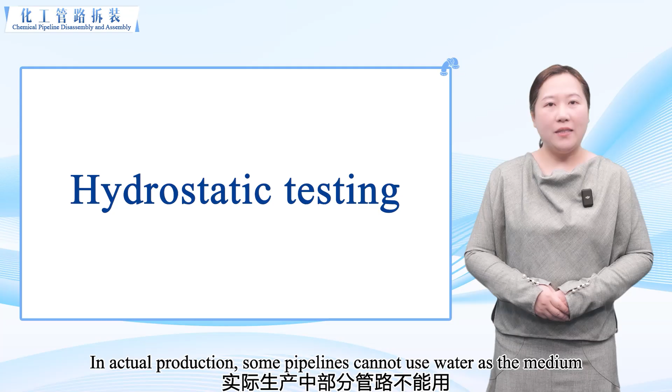In previous lessons, we learned about hydrostatic testing. In actual production, some pipelines cannot use water as the medium to test the strength and tightness of the pipeline, so gas must be used as a substitute. This lesson will focus on the conditions and requirements for pneumatic testing and leak testing.

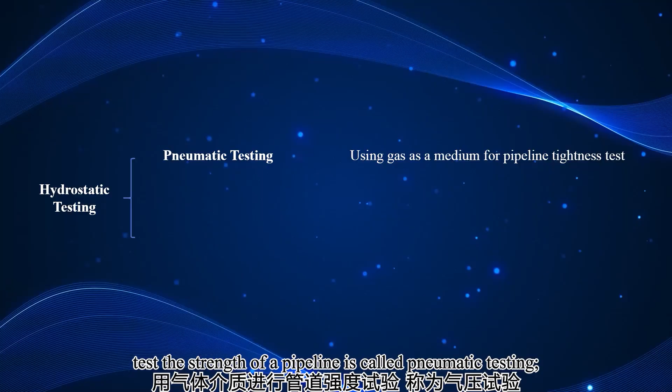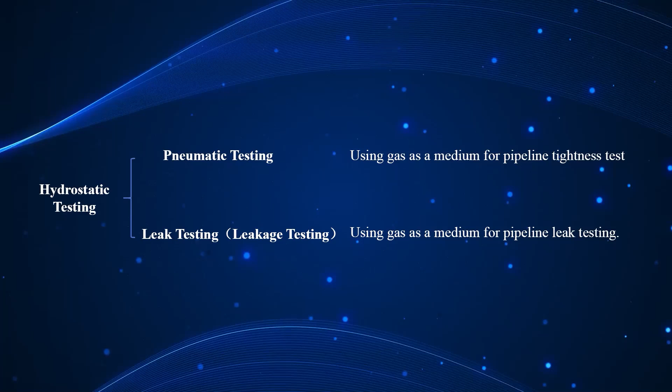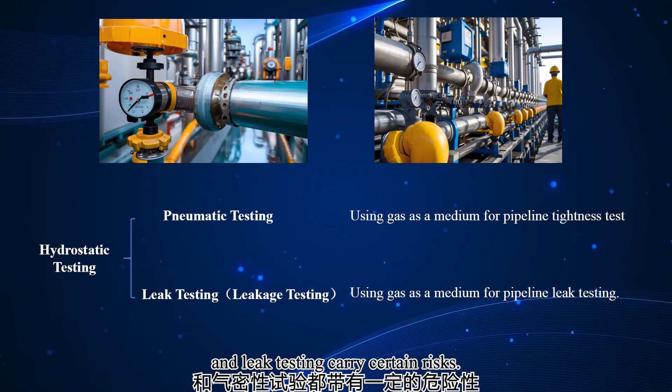Using gas as the medium to test the strength of a pipeline is called pneumatic testing. Using gas as the medium to test the tightness of a pipeline is called leak testing or leakage testing. Due to the compressibility of gas, the energy stored in compressed gas may be released unexpectedly, so both pneumatic testing and leak testing carry certain risks.

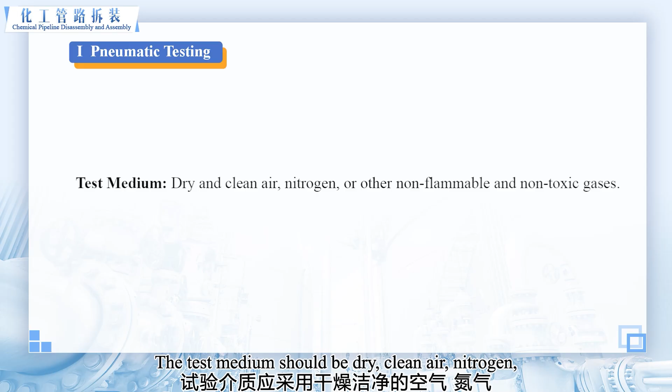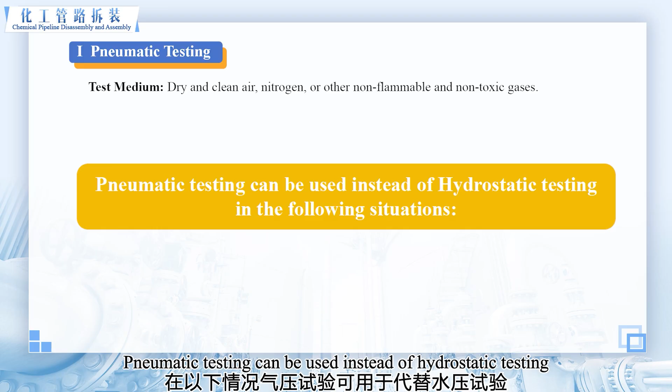Pneumatic testing is usually a substitute for hydrostatic testing. When the latter cannot be performed, the test medium should be dry, clean air, nitrogen, or other non-flammable and non-toxic gases. Pneumatic testing can be used instead of hydrostatic testing under the following conditions.

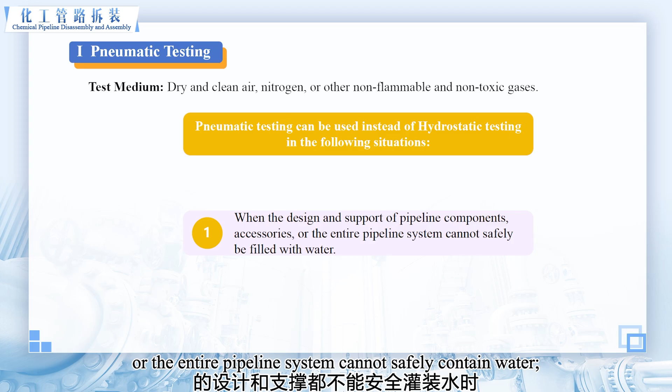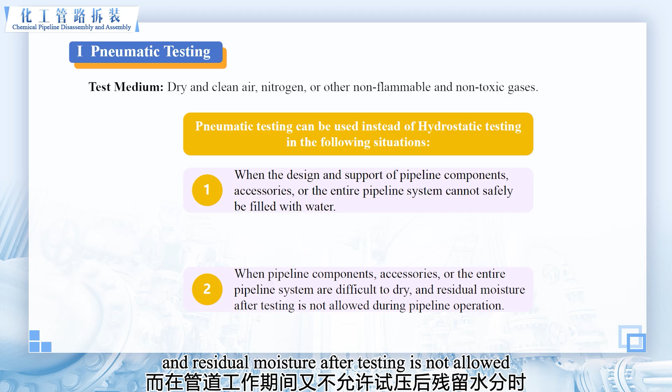First, when the design and support of pipeline components, fittings, or the entire pipeline system cannot safely contain water. Second, when pipeline components, fittings, or the entire pipeline system are difficult to dry, and residual moisture after testing is not allowed during pipeline operation.

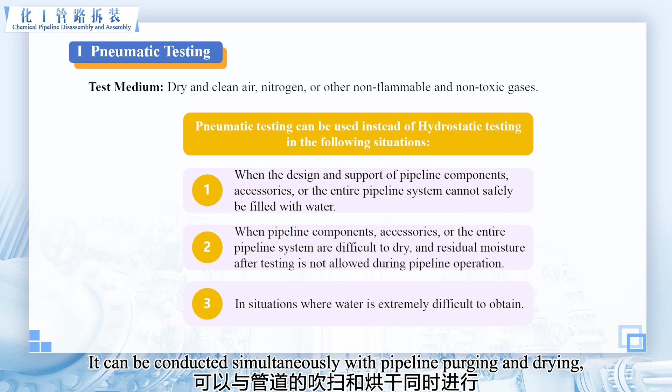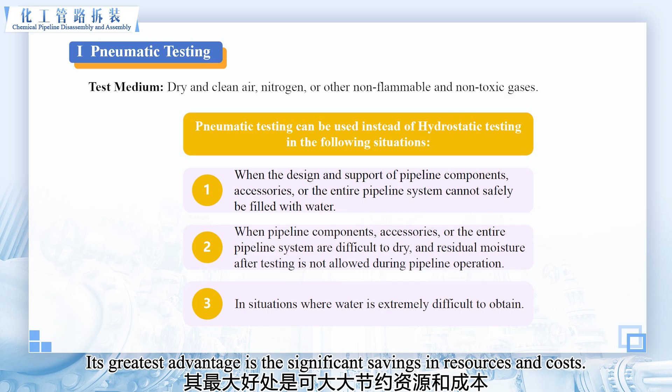Third, in situations where water is extremely difficult to obtain, using gas instead of water for testing carries significant risks but also offers considerable benefits, primarily in saving water resources. It can be conducted simultaneously with pipeline purging and drying, and pneumatic testing imposes lower requirements on support structures. Its greatest advantage is the significant savings in resources and costs.

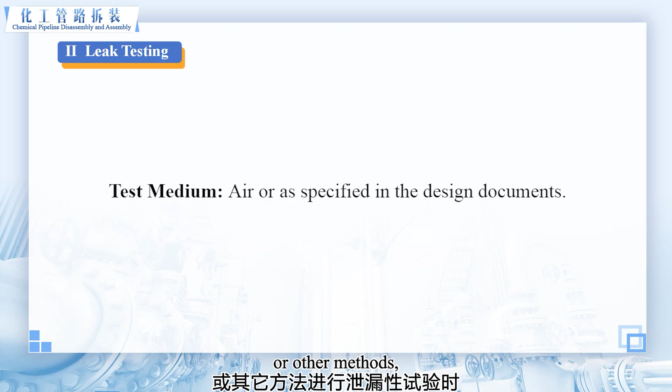Pipelines transporting extremely or highly hazardous media, as well as flammable media, must undergo leak testing. The test medium should be air or as specified in the design documents. Please note that when the design documents and the relevant standards specify leak testing using halogen, helium, ammonia, or other methods, the corresponding technical regulations must be followed.

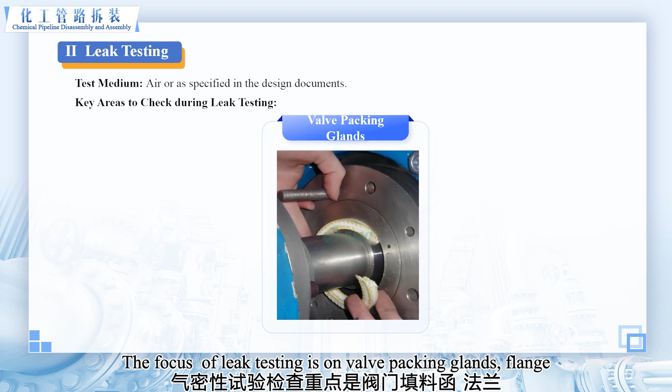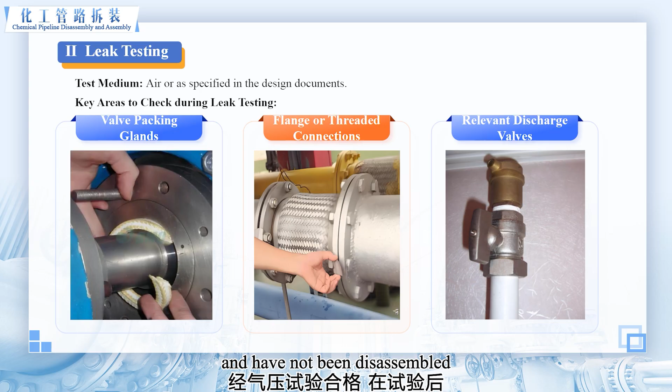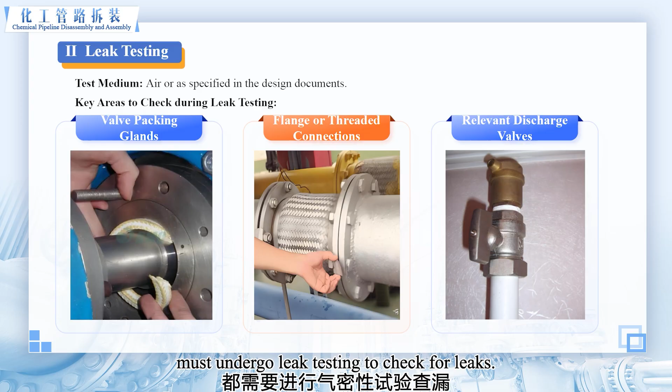The focus of leak testing is on valve packing glands, flange or threaded connections, vent valves, exhaust valves, and drain valves. Pipelines that have passed pneumatic testing and have not been disassembled after testing do not require leak testing. Conversely, any pipeline that has been disassembled must undergo leak testing to check for leaks.

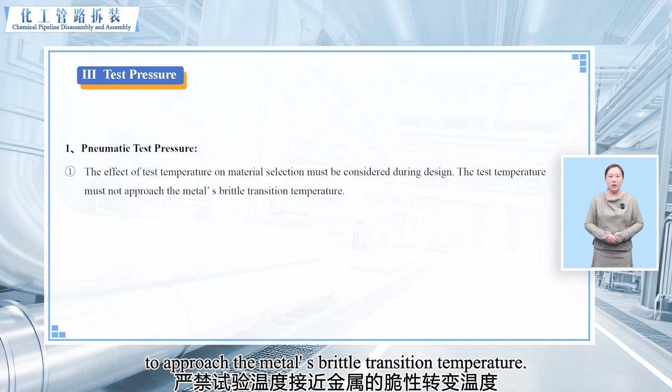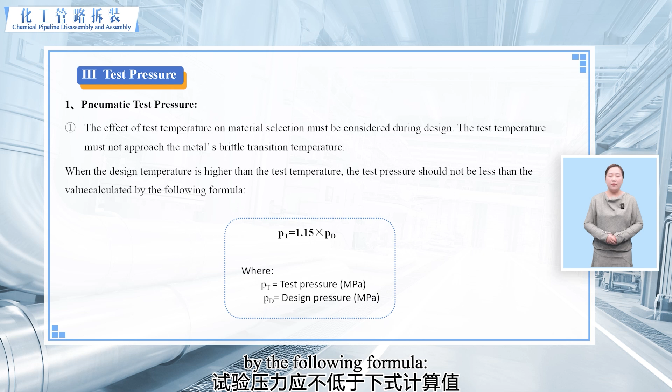There are specific requirements for test pressure. First, pneumatic test pressure. The influence of test temperature must be considered during material selection in design. It is strictly prohibited for the test temperature to approach the metal's brittle transition temperature. When the design temperature is higher than the test temperature, the test pressure should not be less than the value calculated by the following formula, as shown in the figure before the test.

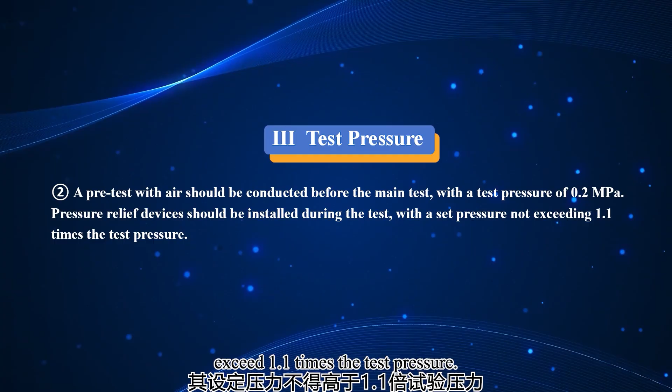A preliminary test should be conducted using air with a test pressure of 0.2 megapascal. A pressure relief device should be installed during the test, and its set pressure should not exceed 1.1 times the test pressure. During the test, the pressure should be increased gradually and slowly.

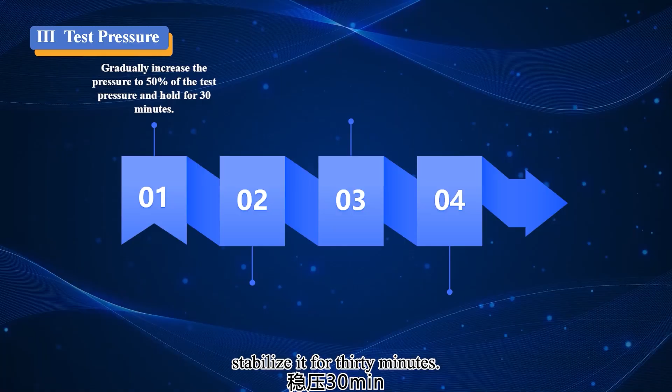When the pressure reaches 50% of the test pressure, stabilize it for 30 minutes. If no abnormalities or leaks are found, continue to increase the pressure in 10% increments of the test pressure, stabilizing for 3 minutes at each level until the test pressure is reached.

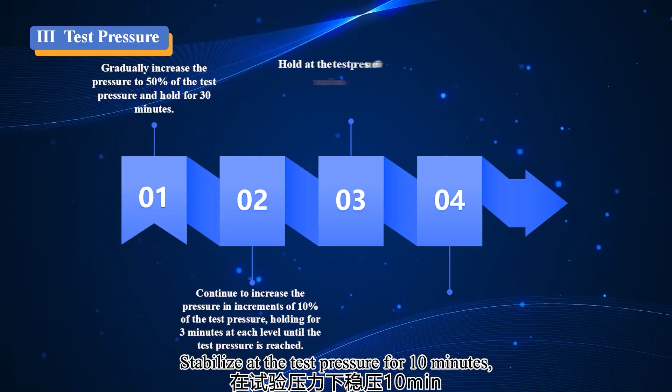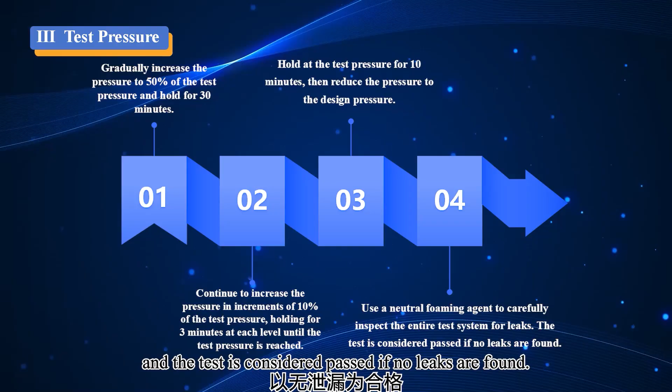Stabilize at the test pressure for 10 minutes. Then, reduce the pressure to the designed pressure. Finally, carefully inspect the test system using a neutral foaming agent, and the test is considered passed if no leaks are found. The leak test pressure should be the design pressure.

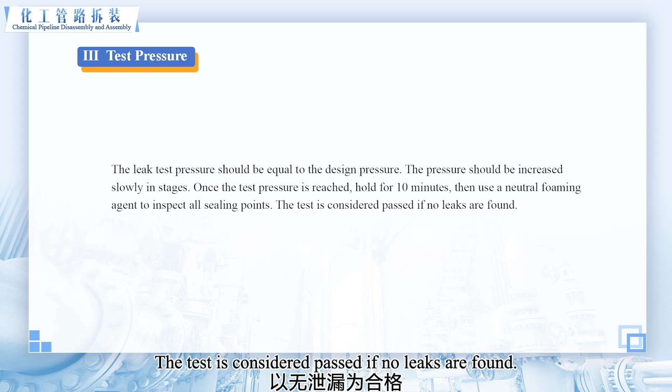The leak test should involve gradually and slowly increasing the pressure once the test pressure is reached. Hold it for 10 minutes. Then use a neutral foaming agent to inspect all sealing points. The test is considered passed if no leaks are found.

Through this lesson, I hope everyone can understand the conditions and the requirements for pneumatic testing and leak testing in pipeline system testing, and be well prepared for the upcoming test operations.